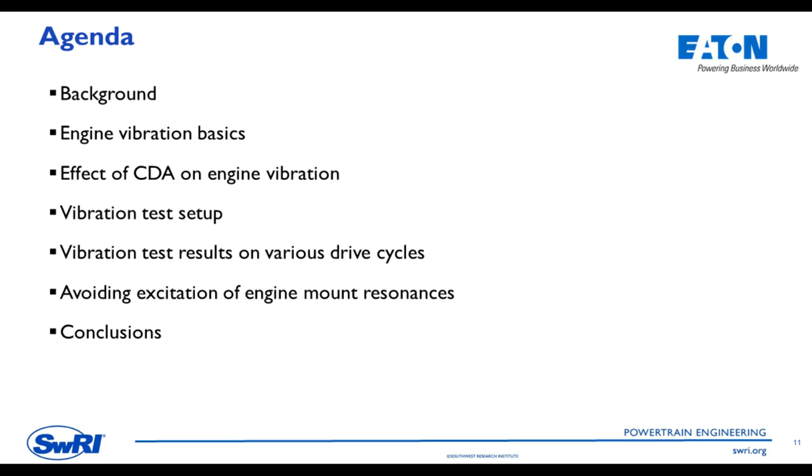So we're going to cover a little bit of background, talk about some basics of engine vibration, and then look at the effect of CDA on that vibration. We'll describe the test setup used in our test cell evaluation, and then the results we got from the vibration tests on different drive cycles. We'll talk about the importance of avoiding excitation of engine mount resonances in practical applications like in a truck, and then wrap up with some conclusions.

As I think everybody's already heard, cylinder deactivation is of interest because it gives you the opportunity to do thermal management to keep the SCR system operating at a high NOx conversion rate, while also reducing fuel consumption during light load operation. By light load, we generally mean at a BMEP of 3 bar or less. Normally, thermal management means you use fuel to make heat in some form, whether that's timing retard, early exhaust valve opening, or intake throttling. There are many ways to generate heat, but they all generally tend to lead to an increase in fuel consumption.

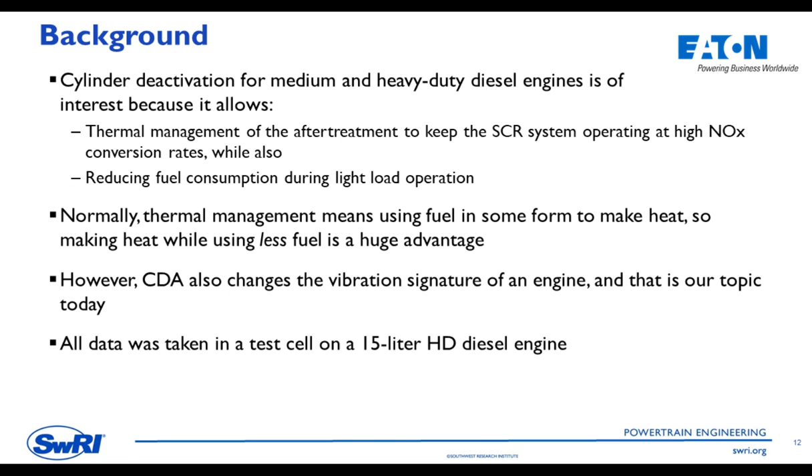The question at hand here, though, is that when you implement CDA, you're also changing the vibration signature of the engine, and that's what we're going to talk about today. All the data we're going to describe today was taken on a 15-liter heavy-duty engine in a test cell at Southwest Research.

So a little bit about vibration basics. Inline six-cylinder engines are considered good for NVH because they have no unbalanced free forces or moments at the first or second order. Let me explain what that means. A free force means a force or alternating force that would cause the engine to move along the X, Y, or Z axis. A moment would cause the engine to rotate about the X, Y, or Z axis. Orders are basically multiples of engine speed, so an event that happens once per engine revolution is a first order event, and an event that happens twice per revolution is second order, and so on.

Because an inline six has no first or second order forces or moments, the primary source of low frequency vibration in an inline six engine is torque reaction due to cylinder pressure. As the piston comes up the compression stroke and cylinder pressure increases, that slows the crankshaft down. As you go over top dead center and back down the power stroke, you're accelerating the crankshaft, and that crankshaft speed fluctuation produces a torque reaction on the engine.

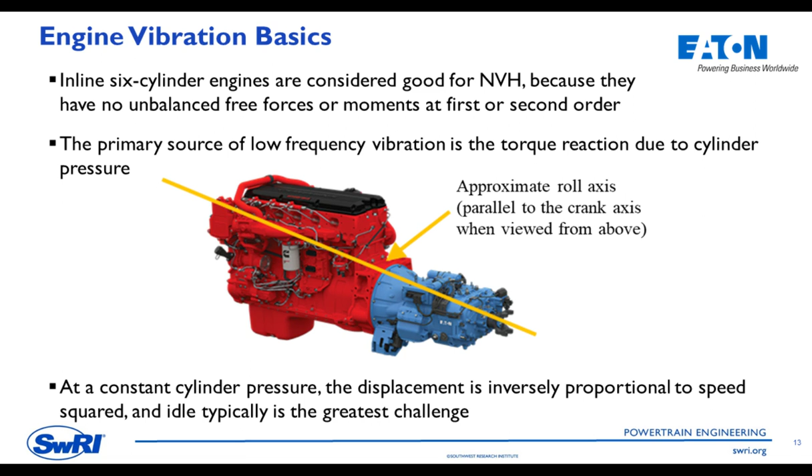Now let's look briefly at what CDA does to engine vibration. We've got a table to help make this clear. The first column is speed, looking at speeds from 600 RPM up to 1200. Then orders: 600 RPM divided by 60 is 10 times per second, so the engine rotates 10 times per second at 600 RPM. First order is 10 hertz, 1.5 order is 15 hertz, and so on up to third order at 30 hertz.

What we care about here is which orders are excited by cylinder pressure to cause the engine to want to roll about its roll axis. In normal engine operation, what we're calling 6 CF, or 6 cylinders firing, shown in black numbers, you can see third order gives 30 hertz at 600 RPM up to 60 hertz at 1200 RPM, with no black numbers at the lower orders. There's a tiny amount of excitation at every multiple of half order, but these values are very small. So the only significant input when the engine is firing normally with all 6 cylinders is at third order.

The story gets a little different with other operating modes you get with CDA. The red numbers represent 2 cylinders firing. When 2 cylinders are active, the firing frequency of the engine is first order. You get 1 firing event per engine rev, 2 firing events per cycle, which is 2 revs. So you get excitation at 10 hertz at 600 RPM, going up to 20 hertz at 1200 RPM.

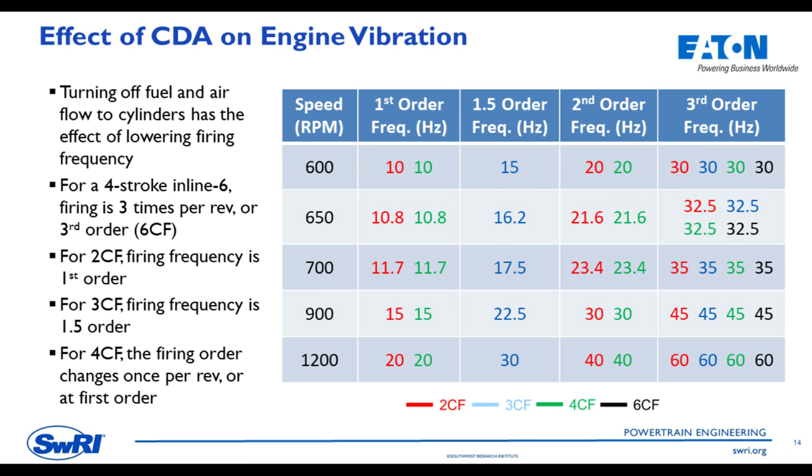So here's a graphical way to look at engine firing and determine what orders to expect. This baseline case at the top, where all the red dots represent all 6 cylinders being active. The period is each firing event, and there's 3 firing events per rev, so we have a third order excitation.

If we go down to the next line, where we've got a blue dot, 2 red dots, a blue dot, 2 red dots, that's 4 cylinders firing. You skip an event, have 2 firing events, skip an event, have 2 firing events. The period being repeated is 1 revolution. Each revolution you have a skip and 2 fires, and that gives you a first order response.

Alternatively, if you run on 2 cylinders, the next row down, you now have 2 blue dots, a red dot, 2 blue dots, and a red dot. Again, you have a periodic event where you're firing once per revolution, so you have a first order excitation.

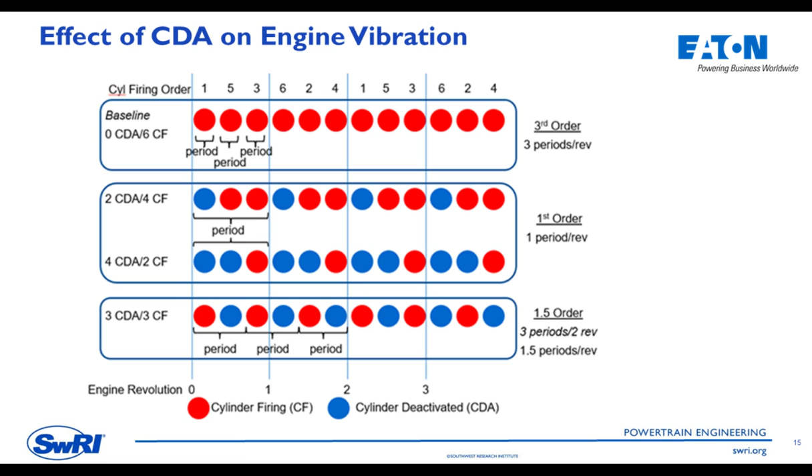And then finally, we have the bottom row, which is the 3 cylinders active row. We're skipping every other firing event, and our period is now 2/3 of a revolution, or 1.5 engine order. So you get 1.5 firing events per rev, and 3 firing events per cycle, which is 2 revs. And of course, this is all for a 4-cycle engine. A 2-stroke would be a different situation, but we don't have to worry about that in the market today.

So what happens when you turn on CDA, in the way the cylinder pressure reacts and the way the vibration responds to that? The plot here on the right shows a situation where at time equals 0, you're in all 6 cylinders active, and then shortly after we turn on cylinder deactivation and run on 3 cylinders firing. You can see that the third order excitation is around 0.7 Gs here in the plot in its normal firing operation.

And when you first enter CDA, you get a little bit of a spike, but then it tails off, third order tails off down to about 0.25 or so Gs. The reason for third order having a decay instead of simply going away immediately when you turn on CDA is what's happening in the cylinder pressure of that deactivated cylinder.

What we're doing when we turn on CDA is we trap a charge of fresh air in the cylinder, and there's actually a choice to be made. You can either fire that trapped charge by putting fuel into it, or you can just leave it as air. But in either case, when you trap that air, it acts like a spring operating against the piston.

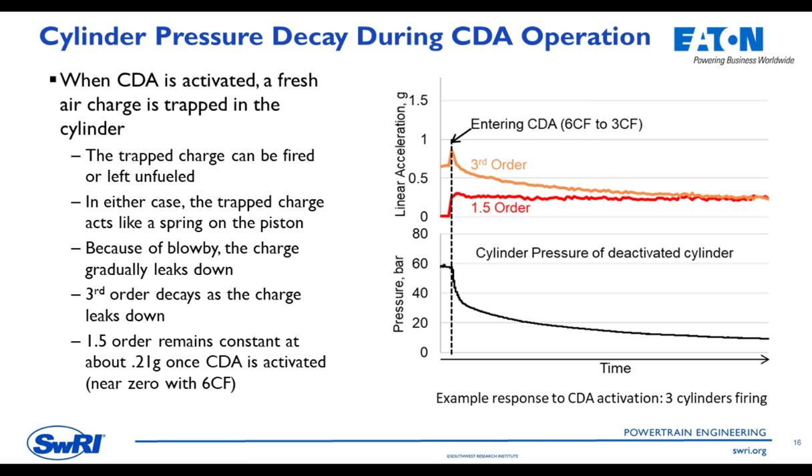If you look at the 1.5 order response here on the top plot, you see that it's basically 0 before CDA is activated. Once it's turned on, you have a constant level of about 0.2, 0.25 Gs that is independent of the decay in cylinder pressure in the deactivated cylinder. So the 1.5 order response is basically just due to the active cylinders. The 3rd order response that is changing with time here is the response of the deactivated cylinders.

So in order to avoid a situation where you have very low pressure in the cylinder at bottom dead center in the deactivated cylinder, and you can pull oil up past the rings and increase the oil consumption of the engine, when CDA is active, occasionally the system will recharge a cylinder, pull in a new fresh air charge, and then trap it and keep it there.

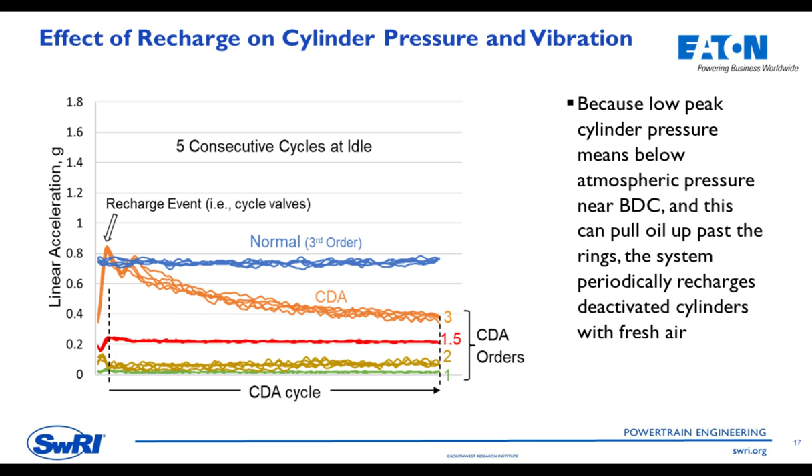So the catch, or the challenge with CDA, is that our acceleration levels at 1.5 order, when we're running on 3 cylinders active, are well below the 3rd order level. Let's go back and look at that again. Here's 3rd order amplitude in Gs, and here's our 1.5 order amplitude down around 0.2 of a G.

But there's a couple catches. One is that displacements are typically a bit higher with CDA, because of that 1 over speed squared relationship between acceleration and displacement—the frequency is half as much. So if the acceleration was identical, the displacement would actually be 4 times greater at 1.5 order than at 3rd order. So it's a good thing that our 1.5 order levels are significantly lower than the 3rd order levels.

The second problem is that lower frequency inputs are more difficult for engine mounts to handle, because you tend to be walking down into the natural frequency of those mounts as you drop the frequency of your input.

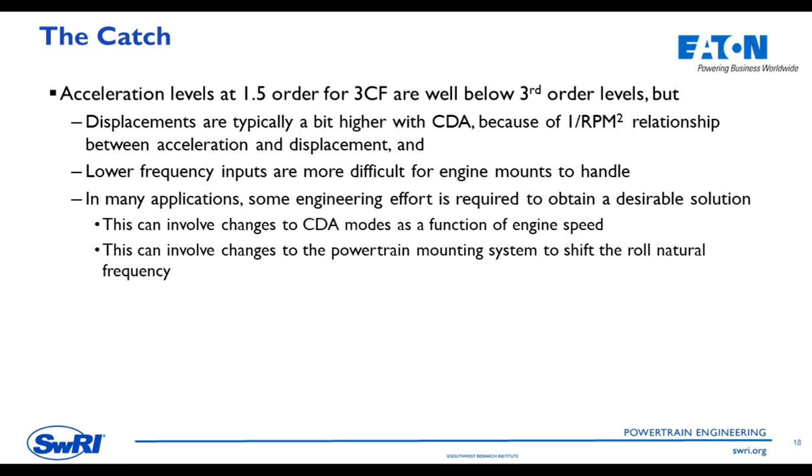So for most applications, you're going to require some level of engineering effort to achieve a desirable solution. There's two ways you can go about that. One is that you can look at changing your CDA modes as a function of engine speed to avoid operating on resonances. The second is you can look at changing the powertrain mounting system—particularly, the goal would be to shift the roll natural frequency of the powertrain down so that you can allow operation with relatively low frequency inputs.

In our test cell setup that we evaluated, we used 4 triaxial accelerometers plus a flywheel speed sensor to get torsional vibration. You can see in the picture of the engine, here's one towards the front of the engine, here's one at the very front mount location, another one on the front of the engine, and then one at the rear mount. This is off of the flywheel housing, and all the mounts went to elephant's feet in the test cell, and they were on soft rubber isolation mounts.

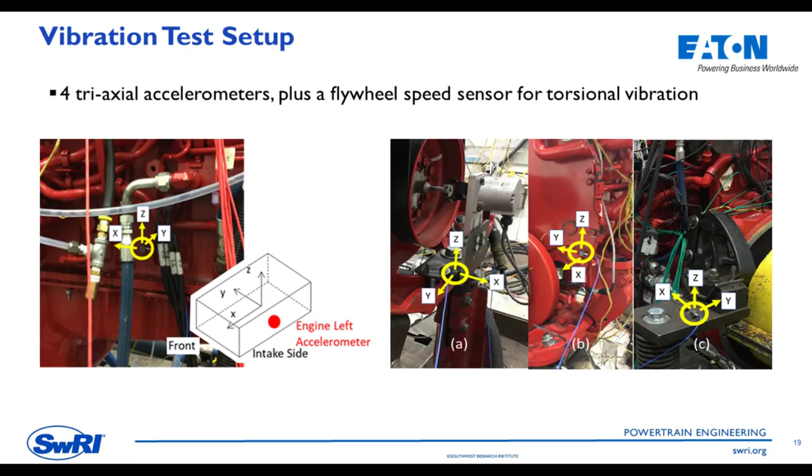Then we evaluated the vibration over 8 different drive cycles that were meant to cover a pretty wide range of engine use, and looked at what percent of the time we're below 3 bar BMEP on these different drive cycles, and then what percent of the time we actually use CDA, and then what mode we use.

So we ran the cold FTP, the transient emissions test cycle with a cold start, the hot FTP, same cycle but with a hot start—and there is a difference which I'll show you here in a few minutes. We ran the new low load cycle, which is going to become part of the emissions requirements for California in 2024, and probably for the EPA by 2027.

This is an Orange County Transit Authority—I think it's a bus cycle—and then there's a New York City bus cycle, a beverage delivery cycle, and the California transient cycle that's used in the EPA GEM model. When you certify a heavy-duty vehicle, one of the drive cycles you get is this ARB transient cycle. Another cycle in the GEM model is the 55-mile-an-hour cruise cycle, which does include some hills, so you have a certain portion of time where you're going downhill and the power demand can be 0, where you're motoring the engine, or it can be very light load depending on the grade.

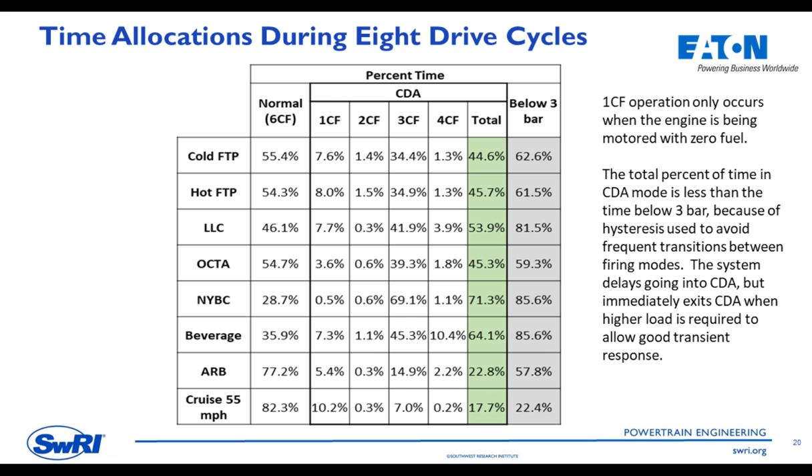So here we're going to have a fairly complicated set of charts that are going to be very similar. I'm going to explain this first one in more detail, and then as we go through the others, you'll see a lot of common characteristics.

This upper plot is linear acceleration in G's over the course of a cold start FTP cycle. The blue curve represents the vibration when the engine's running in normal 6-cylinder mode the entire cycle. The orange curve, which often overlaps the blue curve, is what you get when running in CDA mode. The actual real-time data is fuzzy with a lot of variation. The dark lines are a smoothed response to give an average value of what's happening as you look at vibration over time.

What you can see is that in many cases, especially in the middle part of the cycle, the two are identical, at least in part because you're running in 6-cylinder mode a good chunk of this time. But there are places where there's a separation, where the CDA response is lower than the normal 6-cylinder mode. That's basically where we're running at very light load or idle, so we have an extended period of CDA operation. You see that in these two areas at the beginning of the cycle, and again towards the end of the cycle, where the average vibration for CDA is lower.

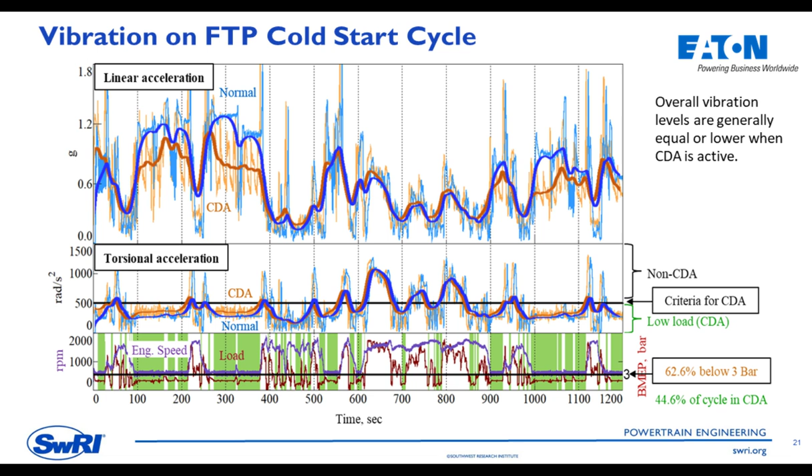So here's the response of the FTP hot start cycle. You'll notice again that CDA has a slightly lower vibration level here in this early part of the cycle. After that, there's almost no difference. And if we switch back and forth between the two, you can see that the vibration level in the cold start cycle is generally higher across the board than it is for the hot start cycle.

The reason for that is when you cold start the engine, the friction of the engine is going to be higher, the oil viscosity is higher because the oil temperature is lower. So you end up using more fuel to accomplish the same task as you do when you're running a hot cycle. And since more fuel means higher cylinder pressure, which means more vibration, that's the reason for the difference between these two figures. Other than that, because it is exactly the same speed, load, time history, the results are pretty similar.

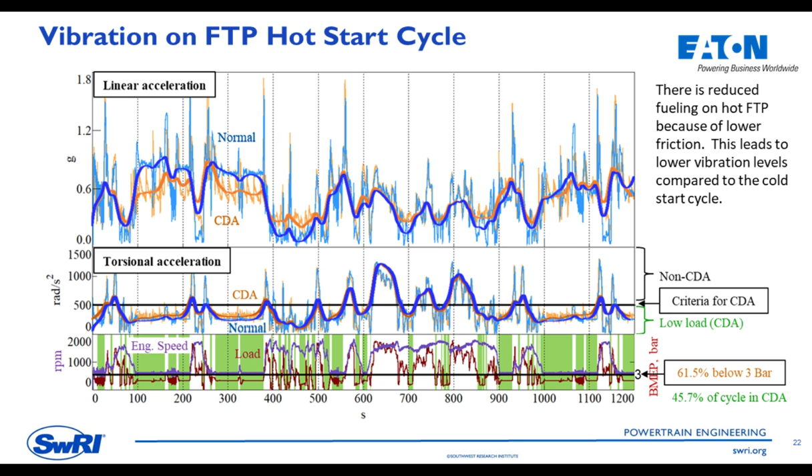Here's a look at the low load cycle. It starts off with a lot of speed variation and load variation, but it's mostly light load, a lot of time you're under 3 bar. It's kind of hard to see in this plot because of the way the time has to be compressed, but there's a lot of CDA turning on and off through this period. Then when you get up around 2,000 seconds here, there's a steady period of idle, and so CDA stays on all the time.

Above that, you see that the torsional vibration amplitude is slightly higher, but still well within the 500 radians per second squared limit. And you see that the average linear vibration is lower than it is for the 6-cylinder active segment. Then we go back into another period where we have fluctuations in both speed and load.

Then towards the end here, from about 4,200 to a little over 5,000, it's mostly idle, and so you see a big difference up here in the vibration levels. Then at the end, there's actually a very brief excursion to relatively high load and high speed, and of course that's on a 6-cylinder firing basis.

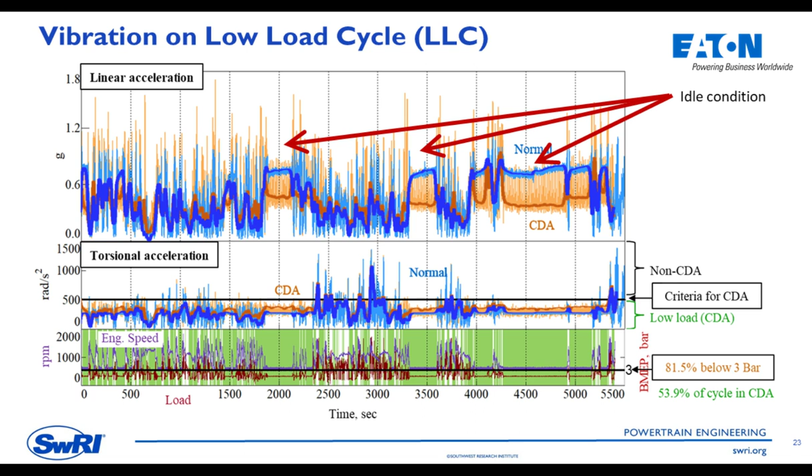The reason for that in this low load cycle is that if you cool off the after treatment and then go to high load, you typically would get a lot of NOx coming through the catalyst without being converted. So the idea here is to keep the after treatment active so that when you do apply higher speed and load at the end of the cycle, you don't get a big NOx breakout.

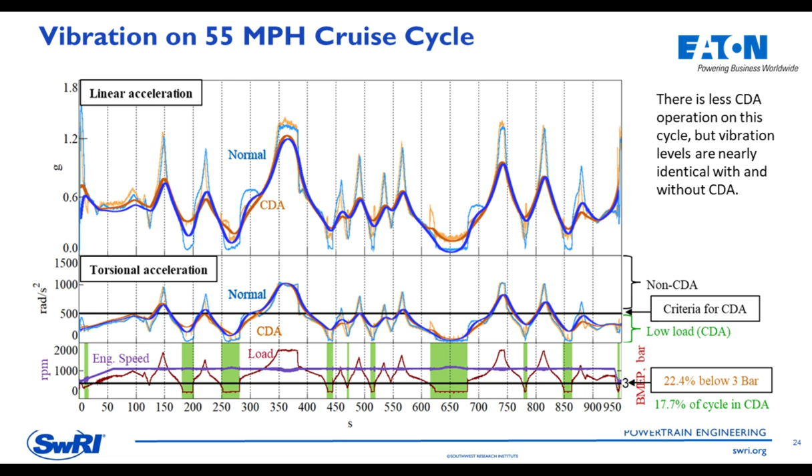But you also see that every time you're going downhill and you have negative load or light load, CDA comes in. In these cases, occasionally the vibration you see is a little bit higher than it is in 6-cylinder mode, but they're always in these troughs where the vibration level's at a minimum anyway. Our judgment here was that this really wouldn't be a factor when you're in a 55 mile an hour kind of cruise mode.

So the way to deal with this, or one way to deal with this, is to change CDA modes so that you're not running in 3-cylinder mode when you're on or close to a resonance. That's what we ended up doing for the test cell system, we went to either 2 or 4-cylinder mode to avoid exciting those resonances. Of course, 2 and 4-cylinder mode would also excite the same resonances at a different speed, so there were speeds where it was very unattractive to run in either 2 or 4-cylinder mode.

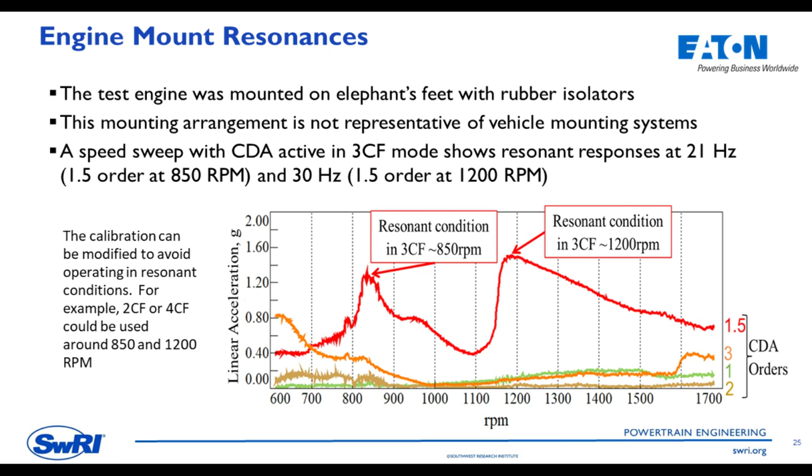Looking at vehicle mounting systems, which is where most of these engines would be headed, heavy-duty truck mounting systems typically have natural frequencies between 10 and 25 hertz for the 6 rigid body powertrain modes.

So the rigid body modes would be motion along the X, Y, or Z axis, or rotation about the X, Y, or Z axis.

And the people who design these systems have constraints on them because you can't move the natural frequency of the powertrain mounts in a way that would line up the resonances with resonances of the vehicle structure. So, for example, the frame rails or heavy things that are attached to the frame rails, like fuel tanks and the radiator system and so on.

So ideally what you would like to have is a mounting system that allows you a low natural frequency in roll along the roll axis of the engine, but then allow only higher frequencies for the other rigid body modes - vertical, lateral, pitch, yaw, all those modes. And that would allow the mounting system to accommodate a lower firing frequency without compromising ride or other vibration that the driver would experience.

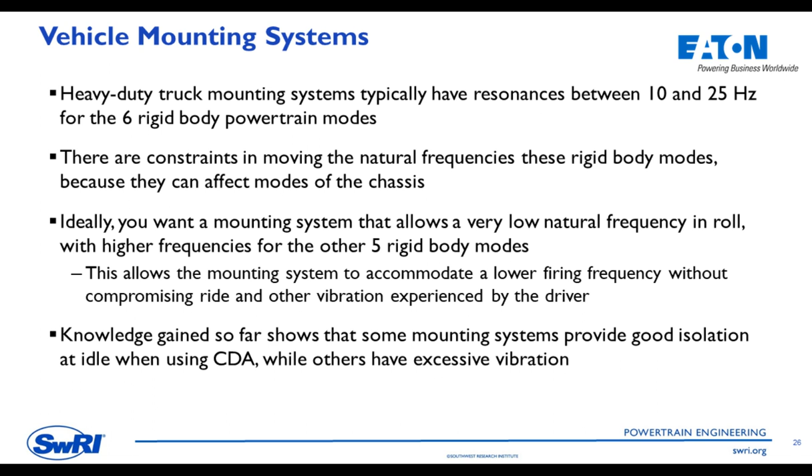So what we've learned so far is that there are production mounting systems out there that give you good isolation when you're using CDA at idle, and there are others that have a problem at idle. So basically, it's a speed-related thing. The higher the speed, the higher the excitation frequency, the less likely you are to have problems. But you can get into trouble as you come down near idle with some of the production engine mounting systems that are out there.

Because of that, Southwest Research and Eaton plan to do some future work in a production vehicle to evaluate what engineering changes are required to ensure good vibration performance in the vehicle with CDA at idle and under low-speed light load operation. We've got 2 projects set up. There's a joint test program with EPA, which actually should have already been finished, but because of the coronavirus pandemic, the EPA's lab was closed for an extended period of time. So that's still to happen this fall.

And then we also have a joint test program with the California South Coast District to look at the same issue in more detail. So basically, it's a preliminary investigation of the truck with EPA, and then a more extensive investigation later with South Coast.

And what we hope to come out of this with is to provide OEMs with specifications on how to design a mounting system that will achieve good isolation with CDA active, and do it without compromising other things that you care about, like mount durability or other aspects of the mount performance - basically make sure you don't create a situation where you have a ride or a vibration problem due to lining up natural frequencies of the powertrain with natural frequencies of the vehicle.

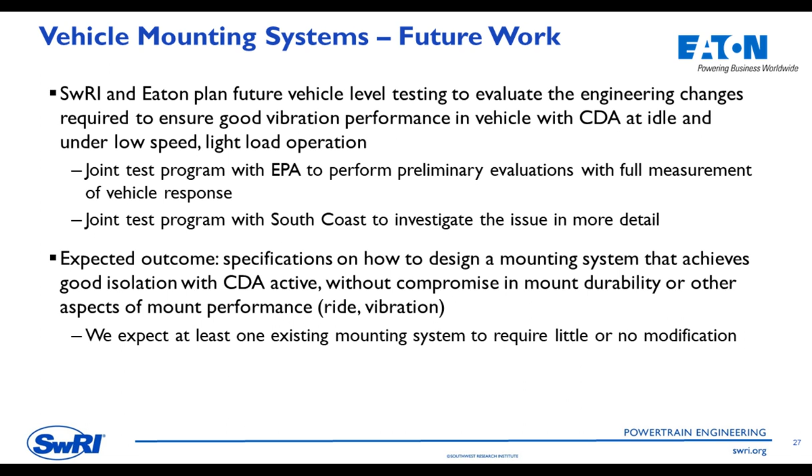And based on our experience so far, we expect that at least one existing mounting system will need little or no modification to work well with CDA, but there are other mounting systems out there that will require modification.

So to wrap things up, we can see that both linear and torsional vibration levels during CDA operation are similar to or often less than levels that you get during normal engine operation at the same speed and load. We don't get any large spikes in vibration during transitions between normal and CDA operation or between different modes of CDA - for example, 2 to 3 cylinder or 3 to 4.

There may be some opportunity to expand the operating time in CDA by trimming the hysteresis. That's really something we haven't explored yet, but we will probably explore it in more detail. And really, number 2 and number 3 are kind of tied together. If there is an objectionable vibration experience for the driver when you change CDA modes or when you turn it on and off, that would limit how much you would want to do that. And since we didn't find those problems, we think there's an opportunity to be more aggressive in how often we turn on CDA or how often we switch modes.

And then finally, the lower frequency of vibration that you create when you're operating in CDA can be a challenge for truck engine mounts at low speed. That'll be the focus of our future work, to define a mount system that gives you good isolation without sacrificing the other characteristics that are important, like durability and ride performance.

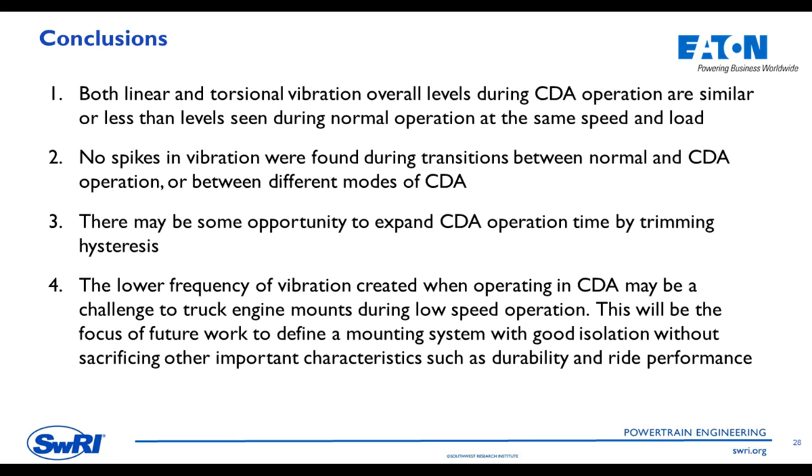And I think that's all we've got for the presentation today, and we'd be happy to consider your questions.